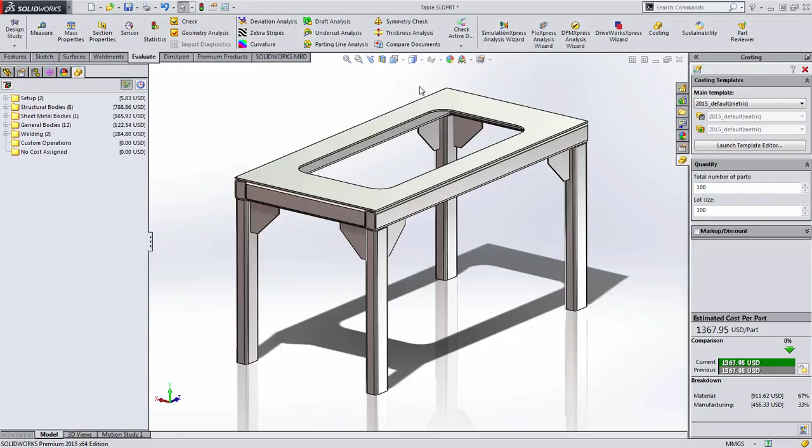The first new method supported is for weldments. In this structure, we have both sheet metal and weldment components. When we launch costing, we now have additional categories for the types of bodies supported.

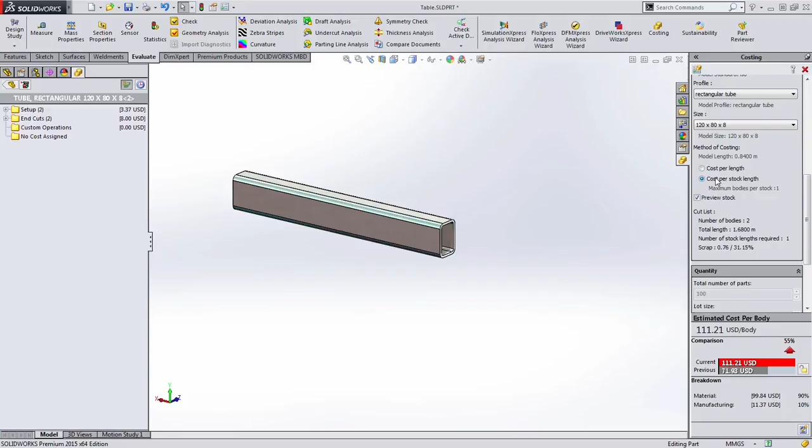What's really powerful about this is that the weldments can be costed based on either an available stock length or on a per unit length cost method. This can greatly help in minimizing wastage of materials based on the lengths needed for the design. The costs update immediately to reflect the change in the method. Any manufacturing or machining operations such as trims, cutouts or holes on the weldments are accounted for as well.

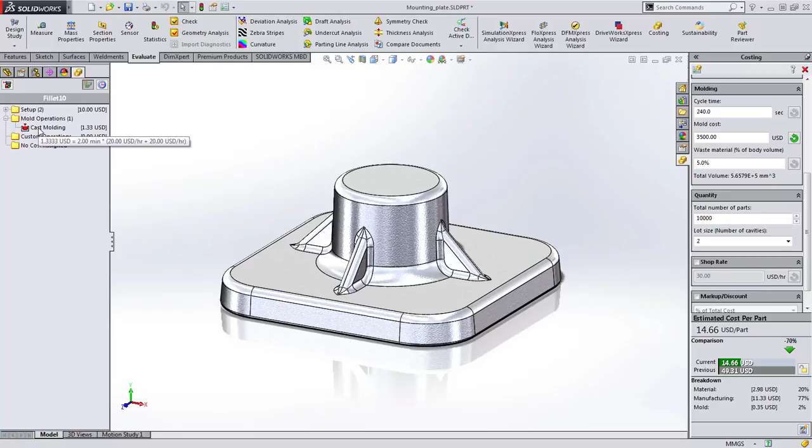Metal cast components are now supported in 2015 with the new ability to account for aspects such as mold cost, cycle time, and the amount of waste material as part of the manufacturing process. You can easily evaluate the product cost change with production volume for distributing costs such as the mold over the entire production run. This helps in being able to consolidate all of your manufacturing cost items within the SOLIDWORKS environment.

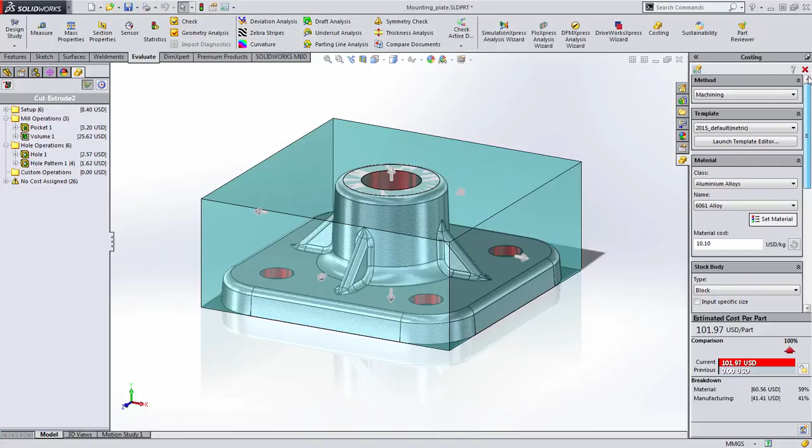A very important update comes when trying to account for machining operations applied to cast components. You're now able to specify a stock body for the machining instead of using the default block shape, and then use either a configuration within the part or an external file to define the cast shape. If costing information is stored with a stock body, it is used as the base cost, and any machining operations are applied on top of that. So you have a far more accurate cost analysis for cast and machine components in 2015.

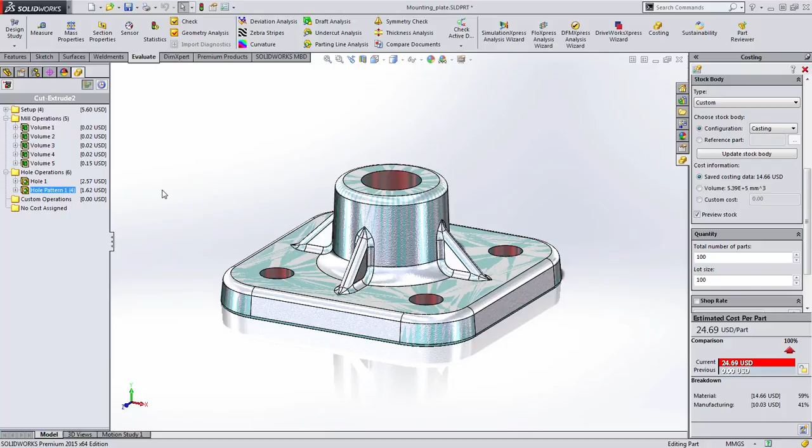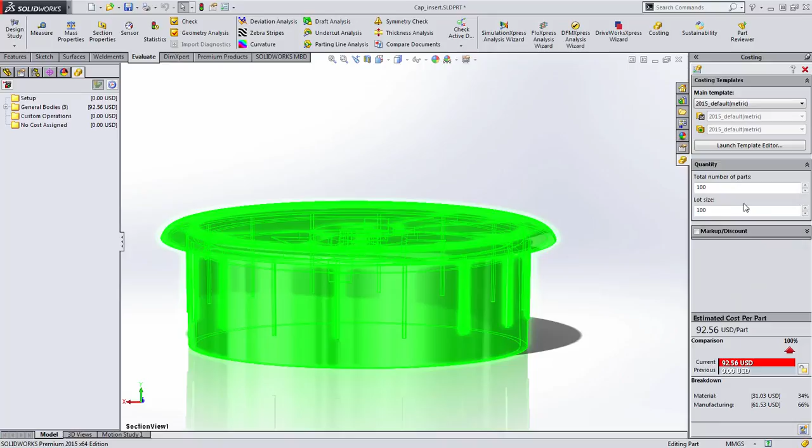Plastic components are also supported in SOLIDWORKS Costing 2015. 3D printed parts can be costed using the 3D printer data stored in the templates. In this example of a desk cable organizer, SOLIDWORKS Costing goes through and calculates the 3D printing cost for each part individually. The template provides several settings to tailor the cost for specific 3D printers.

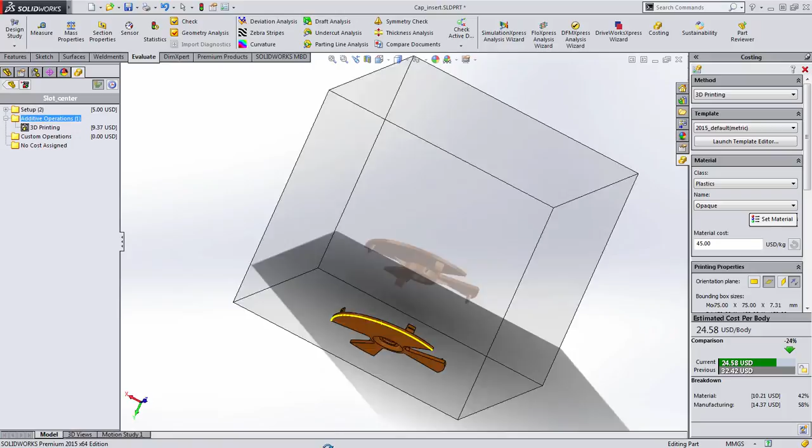Looking at just the slot center part, we can see the 3D printing options. The part can be oriented in the 3D printing volume using a plane selection to ensure the most efficient printing. The amount of infill that is done during printing can also be evaluated to look at the impact on print time and cost.

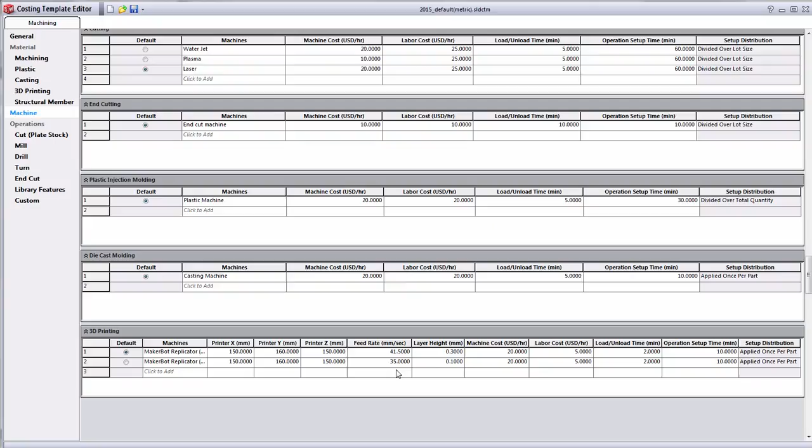You're able to toggle between different 3D printers or different printer configurations to evaluate not only the print time, but cost associated with generating the parts. All of this is rolled up for the multi-body part to account for the costing of all of the components. The templates are fully customizable for adding and specifying the different options on the 3D printers. In this case, you can see the difference between the speeds and layer heights for the different resolutions.

Similar to the support for cast metal components, plastic injected parts are also supported. Aspects such as the runner system, cycle time, mold cost, and waste material are accounted for.

So in Costing 2015, it's very easy now to get a handle on manufacturing costs up front and get a greater understanding of how changes impact costs across all your manufacturing methods.